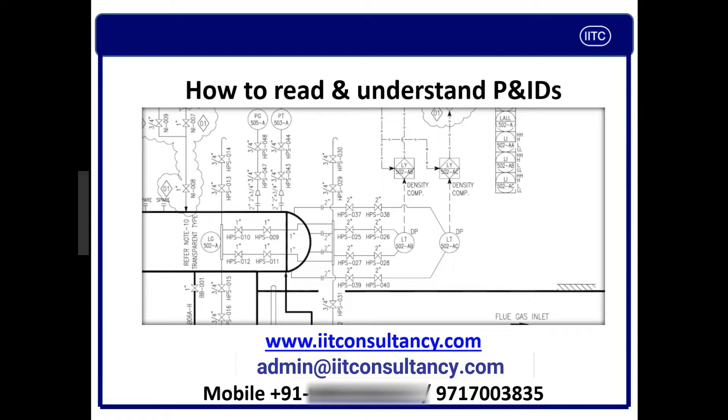The reason is they have not been exposed, they have not been involved in this kind of activity. So this was also my case when I was a young graduate. So I thought this is a most demanding subject and I should make one simple, crystal clear, short training module for people who want to understand what is P&ID and how to read P&ID. So I have tried to put my best into this. This is about me. This is Ved Prakash Singh from IIT Consultancy.

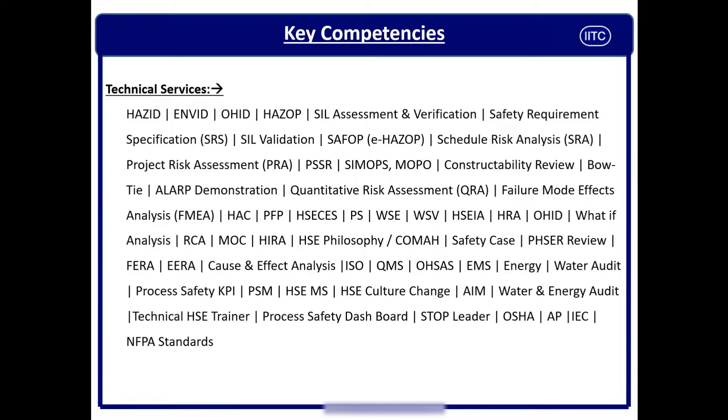I will assure you that you are going to get quite rich information regarding how to read P&ID and what P&IDs are. In fact, I would suggest this course is very much useful for all the people who are working in oil and gas industry, petroleum industry, chemical industry, dyes and intermediates, fertilizer companies, refineries, steel plants, and all process industries where there are processes.

Specifically for those students who would like to build their future in these industries and who want to get a job quicker than earlier, I can tell you we have helped many students get jobs in various industries, across various cross sections of industry, whether they are young graduate engineers, science graduates, arts graduates, or commerce graduates.

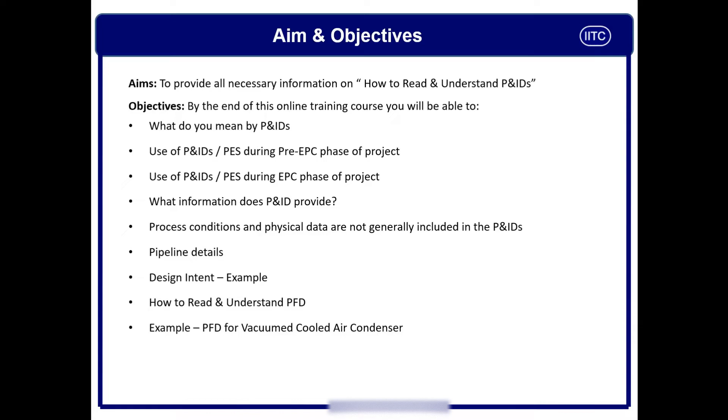We will see how to read and understand PFD. The example of PFDs for a vacuum cooled air condenser has been given for your easy understanding. How to read and understand P&IDs - this is the main topic.

Now we have also given sample P&ID symbols which you can go through to understand the P&ID's requirements. Line numbering - the concept and philosophy of line numbering, because in P&ID you will understand there are many pipelines and there are tags of the line which you will understand. Different abbreviations used in P&IDs, because you cannot write big names due to limitation of space in P&ID, so you will understand the different abbreviations you need to focus on.

Typical basic process control system, BPCS abbreviations - these are very important because you will come across many abbreviations of BPCS being an instrumentation system. Typical instrumented function abbreviations you are going to see. Then reading of the P&IDs, how to track the line from one P&ID to another, and another P&ID to the same P&ID.

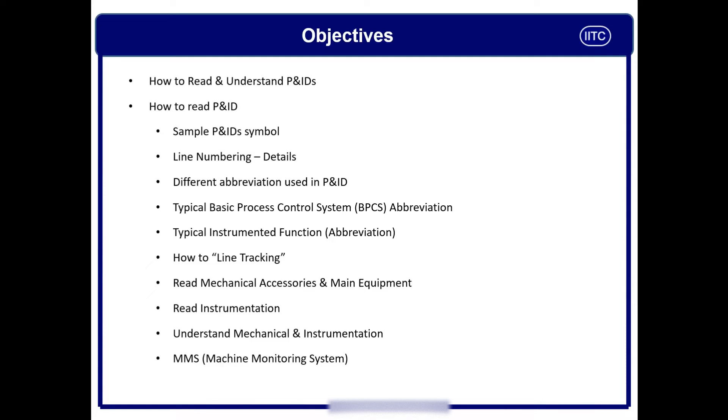Then we will understand the mechanical accessories and main equipment in the P&IDs, read the instrumentation part, and understand the mechanical, instrumentation and machine monitoring system. So gentlemen, let us start with our session.

What do you mean by P&ID? As you know, P&ID is a graphical representation of the process unit and the facility. P&ID uses various symbols to represent actual equipment, lines, instrumentation, flow and other vital elements of the process. P&ID is a complex drawing compared to PFD. In one PFD, you can have many P&IDs due to its complexities. In PFD, you can present a very complex process and instrumentation diagram in simple and easy language, so anybody can understand by tracking the line.

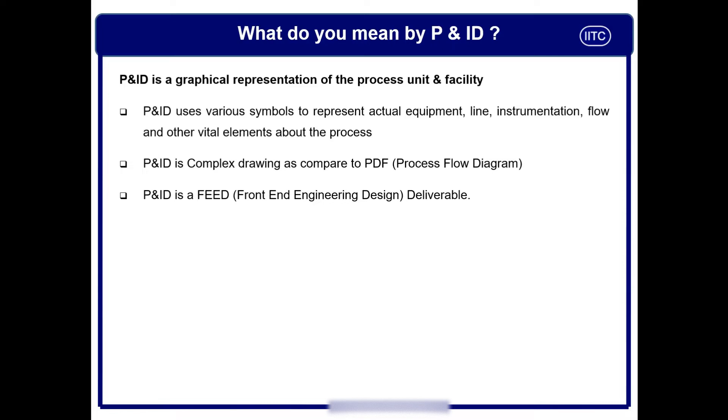Now, P&ID is a FEED deliverable. This is where the P&ID is born and gets developed.

Now we need to understand the use of P&IDs and PEFS during the pre-EPC phase. In pre-EPC phase, P&ID gives very good information. First, it helps us estimate the project capital cost. Second, P&ID is used to develop the contract specification. Yes, with the help of P&ID, we can define the contract specification. P&ID is also used for developing the plot plan.

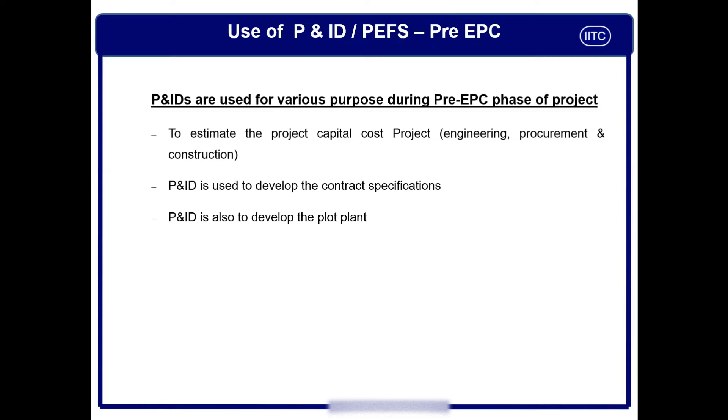Use of P&IDs and PEFS during EPC phase. P&IDs are used for various important activities during EPC phase. The important thing is to develop the plant layout. It is used for developing the plant layout. P&IDs are used for hazardous area classification study. P&ID is the vital document, the number one document, to carry out HAZOP and SIL reviews. Without P&IDs, we cannot do HAZOP, and without HAZOP, SIL review is difficult.

Prepare data sheets of the equipment, valves and instruments. We can count the number of valves, number of pipelines, and size of pipeline with the help of P&IDs. Develop piping layout drawing - P&ID is a vital document which helps develop the piping layout drawing. Prepare bulk material takeoff for piping, electrical, instrumentation and civil. Operation reviews are done with the help of P&IDs, and of course, training of employees can be done only with the help of P&IDs.

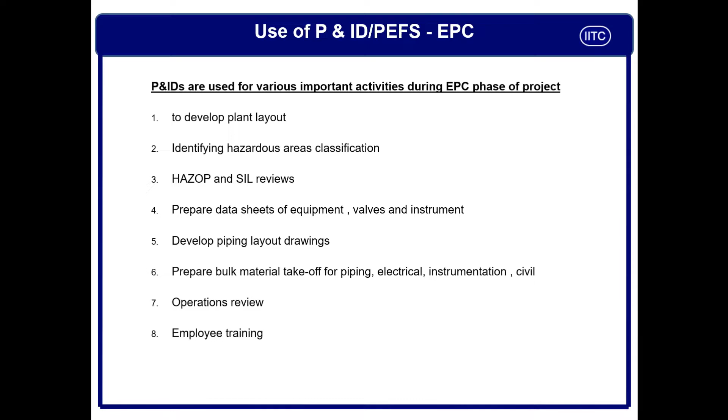What information does P&ID provide? P&ID has a lot of information on the sheet. For example, details of equipment including installed, spare and associated pipings. Piping details like size of pipe, class of pipe, and tag numbers you can understand. Drain and vent lines are mentioned in the P&ID, so you can say where the fluid will go in case of drain and vent. Heat tracing with insulation details are of course given, along with the pipeline.

Associated utilities like instrument air, plant air or cooling water circulation, you can understand with the help of P&IDs. Various electrical and instrumentation information is given in the P&ID. Important details required for design, construction and operations like slope of line, minimum and maximum distance, minimum straight length, we can get with the help of P&ID.

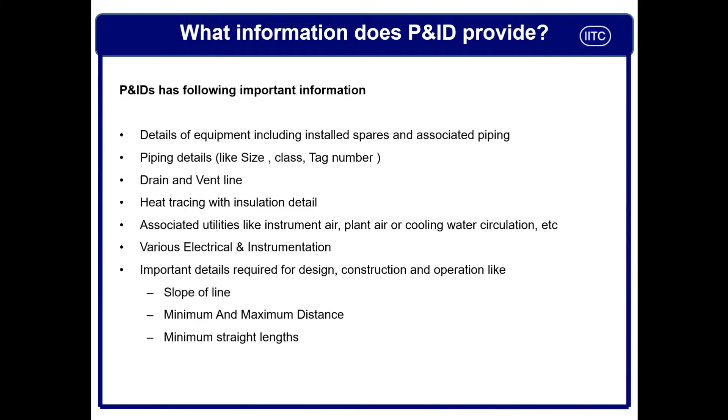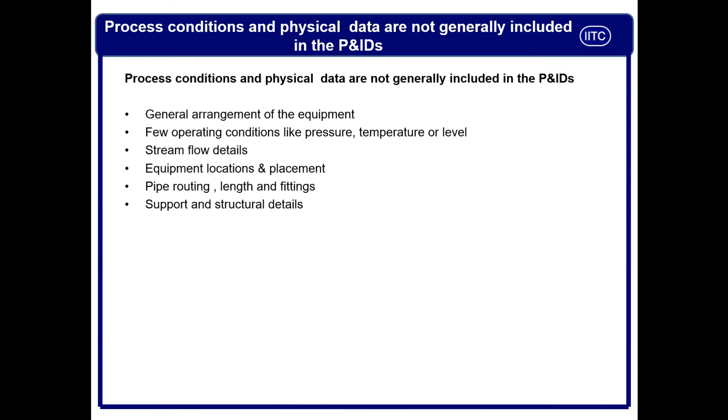Pipe routing, length and fittings are not mentioned. Supports and structural details are not mentioned in P&IDs. So we must know what essential information is available in P&IDs and what essential information is not there, so you can find out the appropriate documents to find the correct information.

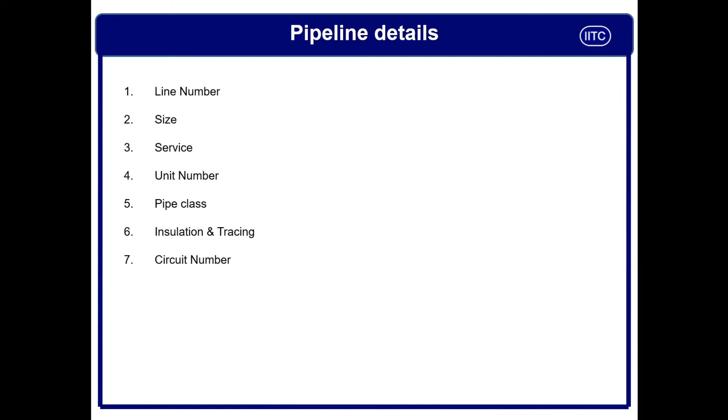Pipe class is mentioned in the P&IDs. Insulation and tracing are given in the P&IDs. Circuit numbers are also given in the P&ID so that you can track and trace.

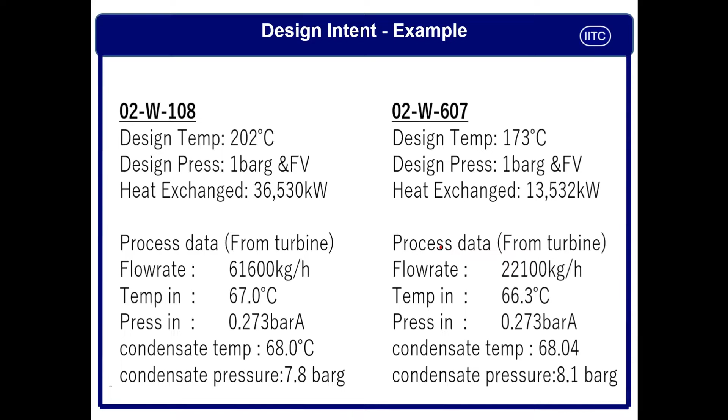Okay guys, as per the name, the design intent, this is the example sheet. Normally in P&IDs you will find this kind of information. You can find out the design temperature, the design pressure, the heat exchange details, the flow rate, again the temperature of the fluid, pressure of the fluid, and so on. So when you see a P&ID, you try to go from left corner to right corner, top corner to bottom corner, so that you don't miss anything and everything is mentioned in the P&IDs.

Gentlemen, how to read P&IDs? It is very essential, and P&ID reading is very easy, and you can quickly track the P&IDs.

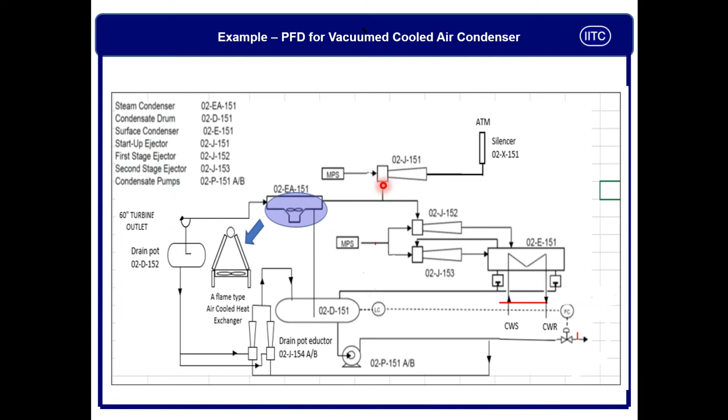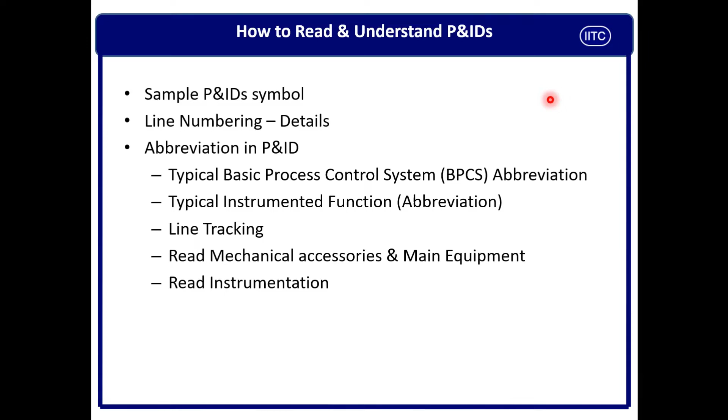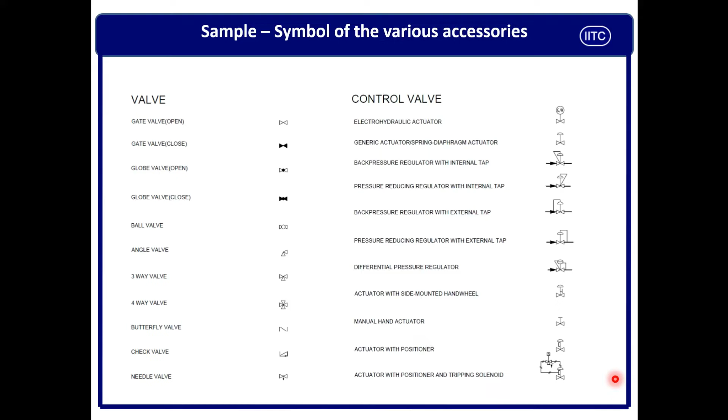These are all control valves. These are all either being triggered with the help of BPCS or some instrumentation. This is an electro hydraulic actuator. This is an actuator for a diaphragm pull controller. This is again a back pressure regulator. So likewise, you can go through all the potential symbols and try to memorize them, because this will help you to read the P&ID very correctly.

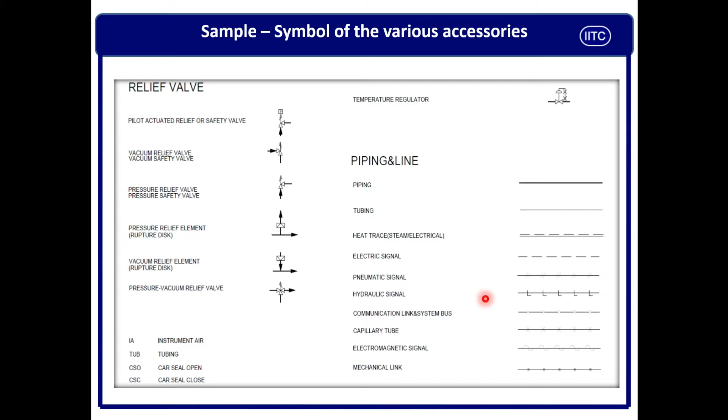I have seen in my experience, when you get a package that has a P&ID, then you will also get the symbols with that, because sometimes there is a change in symbol because of company systems. Line tagging or line numbering.

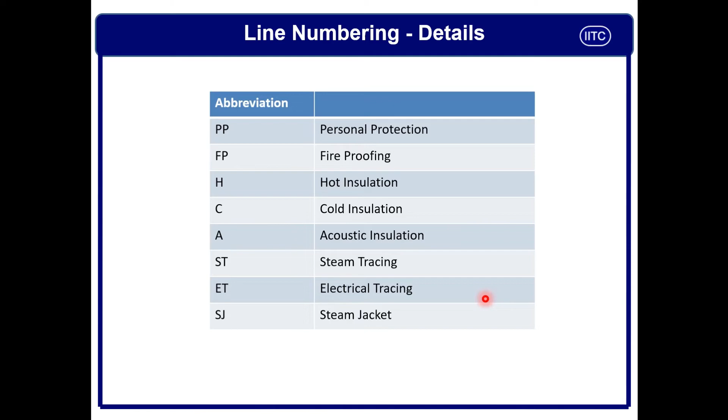In line numbering, you get this kind of information. PP, if you see PP, this means personal protection, you need personal protection. FP means fireproofing, that means you need to have fireproofing on this pipeline. H for hot insulation, C for cold insulation, A for acoustic insulation, ST for steam tracing, ET for electrical tracing, SJ for steam jacket. So this all we have in the P&ID.

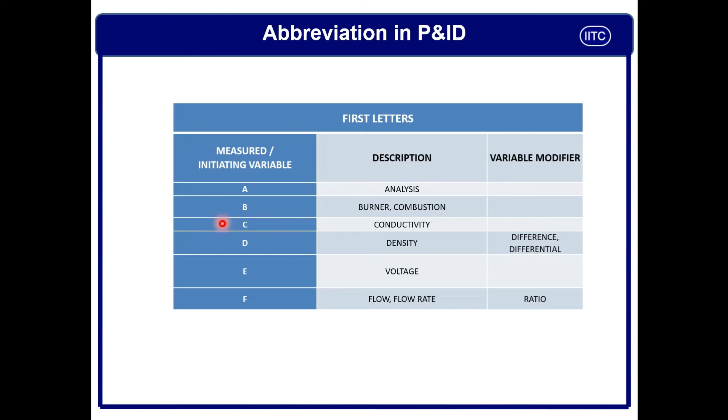Abbreviations in P&IDs. There are different abbreviations given which are nationally and internationally recognized and approved. So likewise, this is the description - analysis, burner and combustion, conductivity, density, voltage. So corresponding to that there is some sentence, some symbol. But this is what we need to remember.

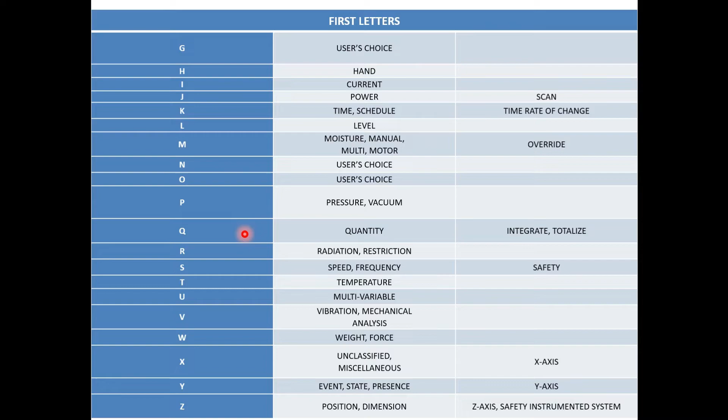This is the same from G to Z. There are different meanings you can understand, I mean, with all alphabets. This is not necessary to remember. When you get any P&IDs, you can go through the symbol, representation and abbreviation of that P&ID package. You will understand everything. But 99% of symbols are the same, which are internationally recognized.

This is the basic process control system abbreviation. Like AE means analyzer element. BE means burner element. DT means density transmitter. EIV, emergency isolation valve. FV, control valve. IT, transmitter current. LG, level gauge. LV, level valve control.

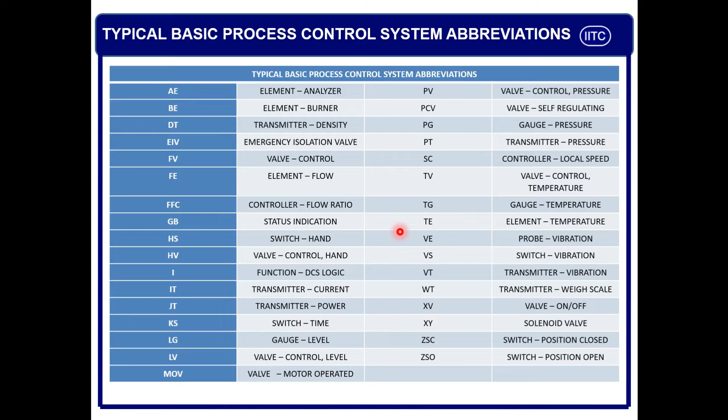MOV, motorized valve. So this is how we need to remember these abbreviations and their full forms. To get a complete P&ID review and update, with the help of this, you can definitely become a good reader. Likewise, there are different

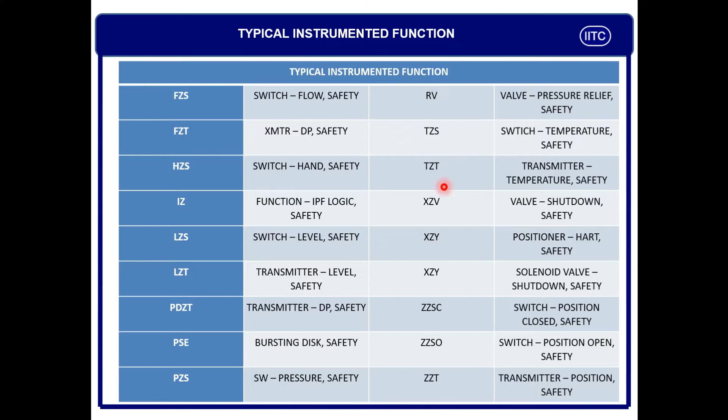abbreviations for instrumented function. FZS means flow safety switch. This is XY, XZY, this is position safety. This TZT, temperature transmitter safety. This PSE is bursting disc safety. PZS is pressure safety. So likewise, you need to remember these symbols so that you understand the P&ID very correctly, which will help you

in further study. So gentlemen, now let us start with line tracking. First we will see how to read the P&ID for the mechanical lines. Let us track. This is the inlet. The arrow in means something is coming from the outside, and this will go with the help of this valve. And there is a mechanical spacer. Spectacle blinds are there. You see on the top there is a black dot, and in the bottom there is a 0 with no black.

You can see white. So this 0 means open. That means this valve is normally open. And if you see the black part, that means this is normally closed or temporarily closed. You see this full line is coming, and then a dotted line. That means this line goes almost to the bottom of the tank, and then discharges the liquid or fluid inside the tank. And you see there is one line going from the bottom side, and you see LT. That means this is a level transmitter.

If the liquid level is low, if the liquid level is high, what action am I supposed to do? This will give LALL and LSLL. This will give LAHH and LSHH. Overflow line to drain. So there is an overflow line going from here. If the tank is filling over, the overflow line will drain to a sufficient and suitable location.

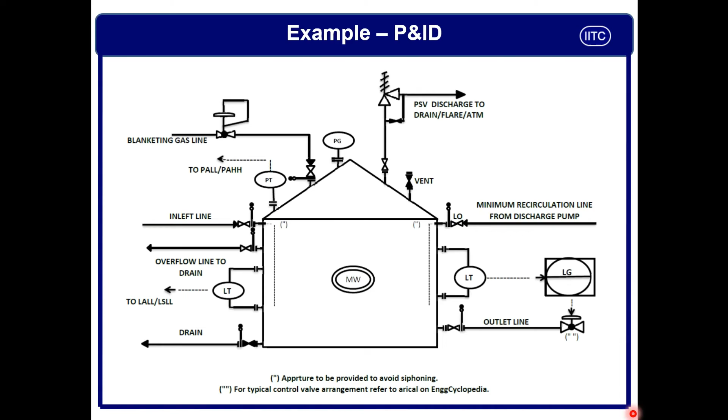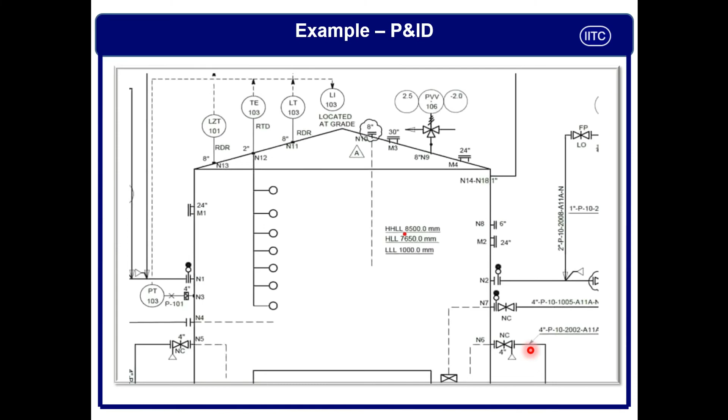M2 is a spectacle blind and the open area always remains open. You can see here this line is coming here and getting joined here. So likewise N7 is normally one valve closed, normally closed, and there is another line given over here. So this is how, guys, you understand the instrumentation of the process in the P&IDs.

These are again the different instrumentation. You should understand LZT is connected with radar 101, then LZI is there, and level switch high will be there, and there is a temperature element in the system. Then the level transmitter is there, which gives the signal to the tank gauging system, and from here TAH and TI are given.

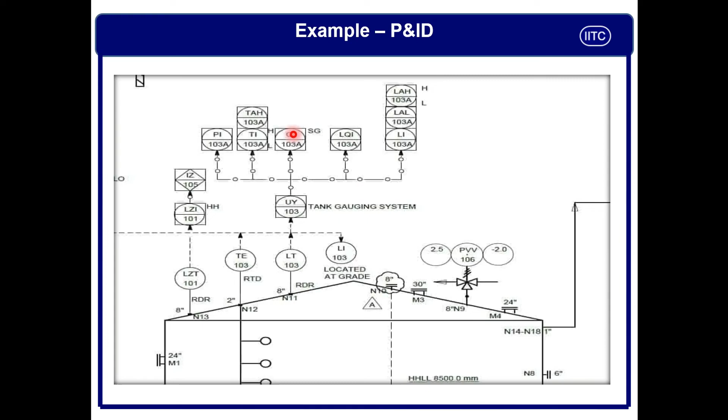Likewise, you can see PVV 106. So this is how we read the instrumentation. It needs practice to understand the instrumentation. This is a bit complex, but try to understand. On the boiler discharge line, superheated steam, you have this kind of instrumentation control. This is minimum control, and there are other things. I am not able to show the P&ID because of a copyright issue.

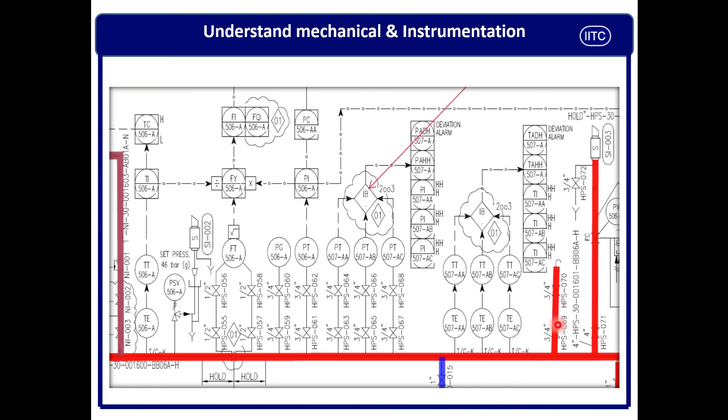So likewise there is a pressure transmitter, pressure indicator, PAHH, pressure alarm high high, PAH, pressure alarm high. And if you go downstream, TE507, TE507AB, TE507AC are given. So, gentlemen, this is the part of instrumentation and piping and instrumentation diagrams, P&IDs.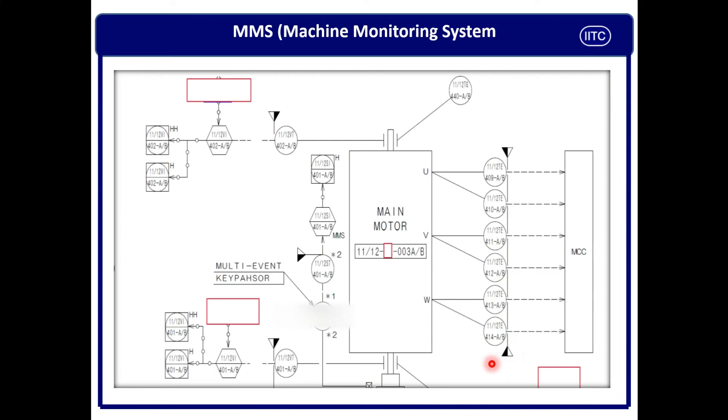So guys, I was a bit fast. I wanted to give you clear cut, short, crisp information on how to read P&IDs and PFDs. On PFDs I have given very little information. We have separate training on the importance of PFDs and how to read PFDs. If you are interested, you can go through it later from our website. We have detailed training on P&IDs, the use of P&IDs, the weaknesses of P&IDs, how to improve our P&IDs, and how to keep P&IDs updated over a period of 3, 4, 5 years. These are a very essential part.